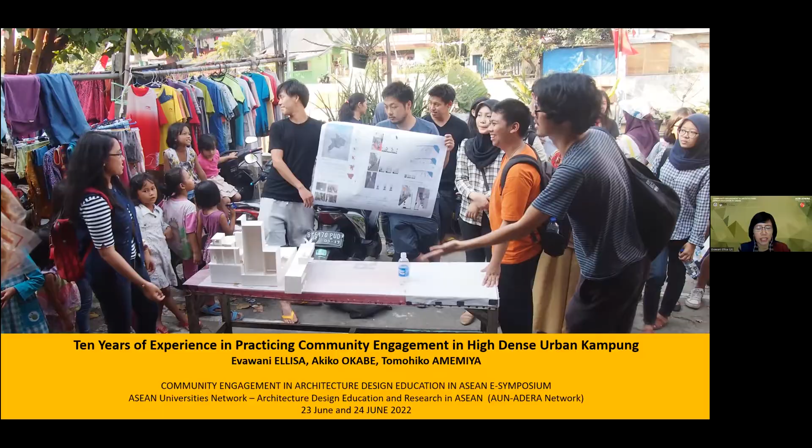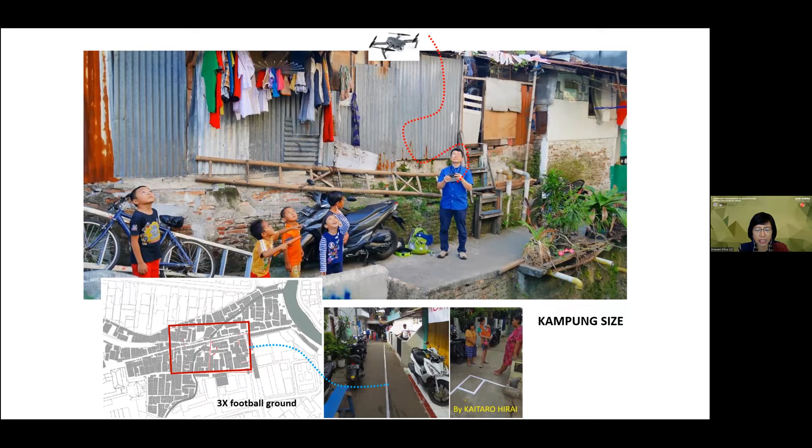Kampung Cikini is a very small, crowded settlement. It covers only 3 times the size of a football ground, or less than 4 hectares. One day, a Japanese student tried to literally draw the football ground on the map and painted the boundaries on any surface visible to be drawn, and the result is like this. The kampung structure is so complicated that we needed to fly a drone to figure out the exact situation of this kampung.

The pocket of Kampung Cikini sits in a very good location at the second ring of Jakarta, where the national monument of the first ring could be clearly identified. If you want to visit this kampung by commuter line, just stop at Cikini station and cross the street. This kampung is divided by an old market called Pasar Cikini, which forms an axis from the station to the bridge, one of the 5 gates existing at Cikini.

A small river, the Keroncong River or Kali Keroncong, lies perpendicular across the market, and the river goes all the way to the big Ciliwung River. The surrounding commercial and business development enables the inhabitants of this kampung to gain economic opportunities by offering services and petty business.

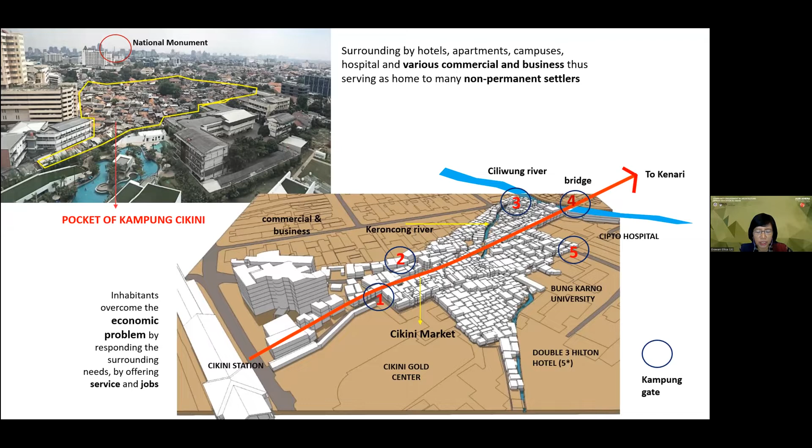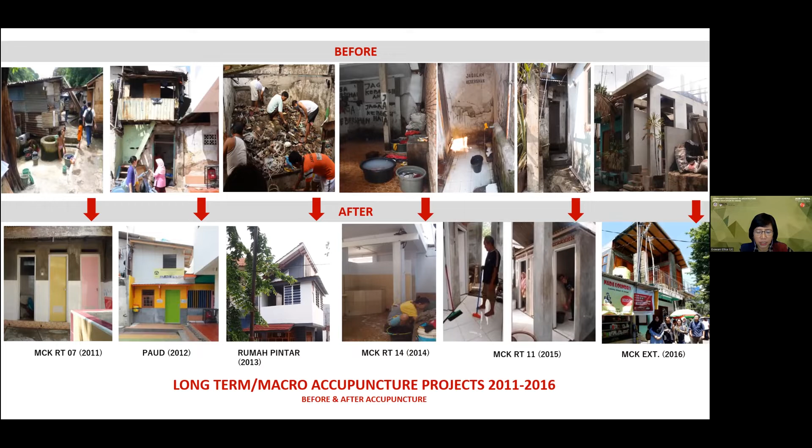To let you know, what we have done in Cikini in these last 10 years was not easy. But in short, we have 2 types of engagement at Cikini. One is through design and build projects, which we call urban acupuncture, or macro project. This is the situation before and after acupuncture.

The other engagement is regarded as a micro project, the UI-Japanese students joint studio workshop with the tagline JKTWS in Bahasa Indonesia. These activities had consistently never been absent every year until 2020, and we also consistently recorded all JKTWS into these booklets. Some of the macro projects at Kampung Cikini were the UI Community Engagement Project.

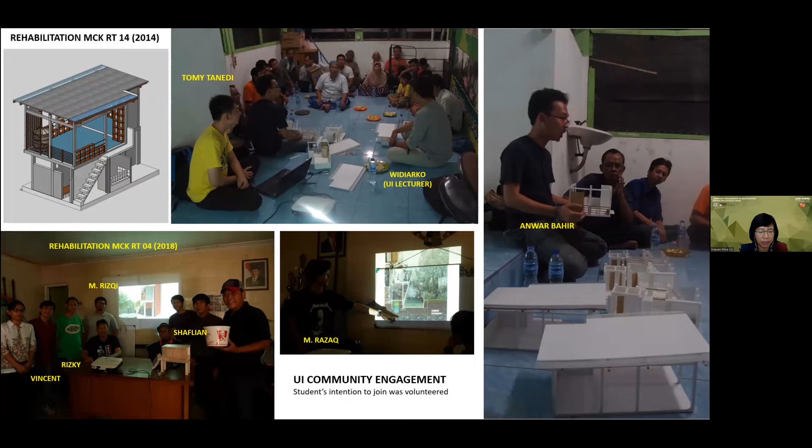In this case, I invited students through open recruitment. The community engagement at campus has never been part of the curriculum, so students never got credit for their participation. So their intention was mostly voluntary.

3 macro projects were conducted through collaboration with students of Professor Akiko Okabe under the supervision of Mr. Tomohiko Amemiya. Japanese master students lived in Kampung Cikini and supervised the project while doing their master research project. Some UI students were usually interested to join, partly because they wanted to engage with the community and partly because they wanted to make friends with Japanese students.

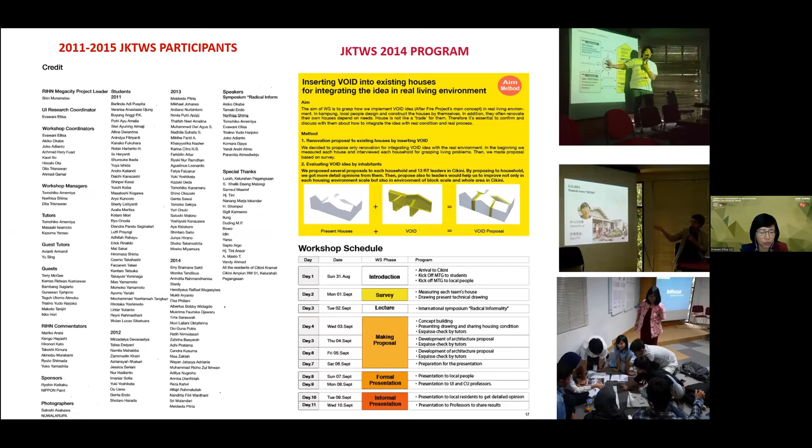In the micro small project, 8 to 10 master's Japanese students mix with 10 to 15 UI students, and they work hand in hand for 10 days. The workshop was divided into 2 main phases: the field survey at Kampung Cikini and the workshop studio at UI campus. The final proposal of the workshop was prepared into 2 different presentations.

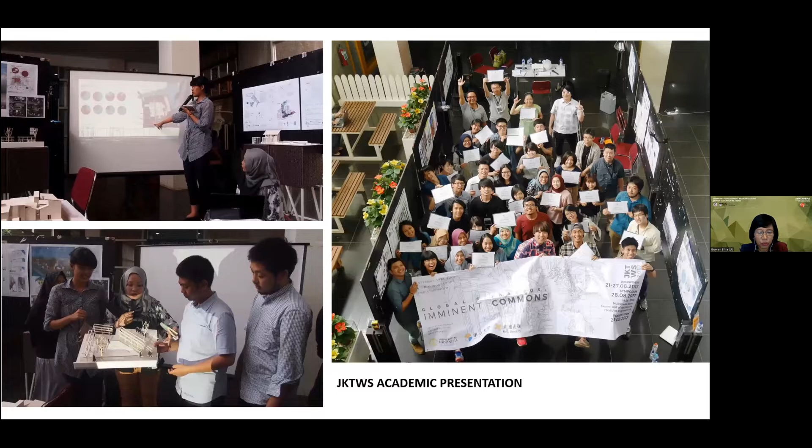One was an academic presentation at campus, and the other was a presentation in front of the Kampung community. Regarding the course, for the Indonesian student side, the workshop was not required but optional, since 10 days was too short to include the workshop into the curriculum.

However, although JKTWS is regarded as an extracurricular activity, many students were eager to join. JKTWS was also popular since students gained the opportunity to join an international program, enriching their portfolio and expanding their international network. The JKTWS was also conducted online in September 2020, and this time I tried to include the workshop into the online studio design course 5 as an additional assignment in the first and second week of the course.

Now let's go back to Cikini. Walking through the alley of Kampung Cikini will allow you to experience the hardship of the kampung's living condition, intensified by crowding inside the houses and crowding outside the houses. Walking slowly through the alley, we understand that all elements along the alley have certain meaning and function. The kampung arrangement and neighborhood condition expose how the spatial practices at kampung put into question the conventional distinction between public and private.

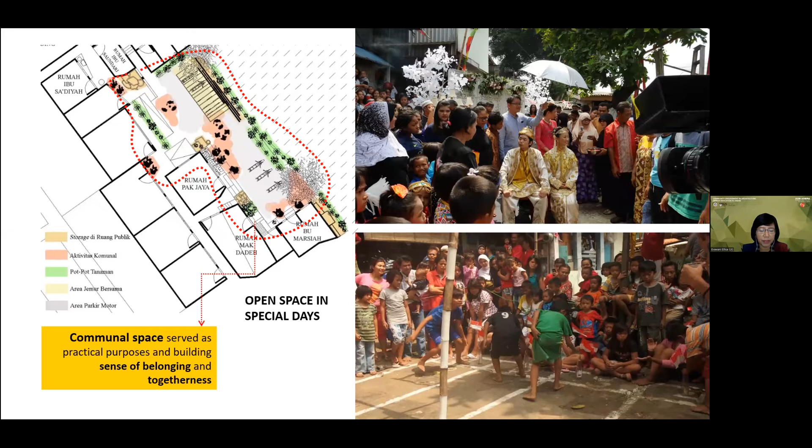Of course, on special days, like during the celebration of Independence Day, this open space is turned back to its original role as a true children's playground, and even for having a wedding ceremony, getting back to its practical purpose to build the sense of belonging and togetherness.

Now let me explain about the most important infrastructure: water. A hundred years of history at Kampung enabled the community to do self-help urban service, or informal infrastructuring. Unlike a normal neighborhood, in Kampung you become part of the infrastructure itself. If you want to go to the toilet, you have to fetch water to do your business, a situation very different from a normal neighborhood where you just simply flush and finish.

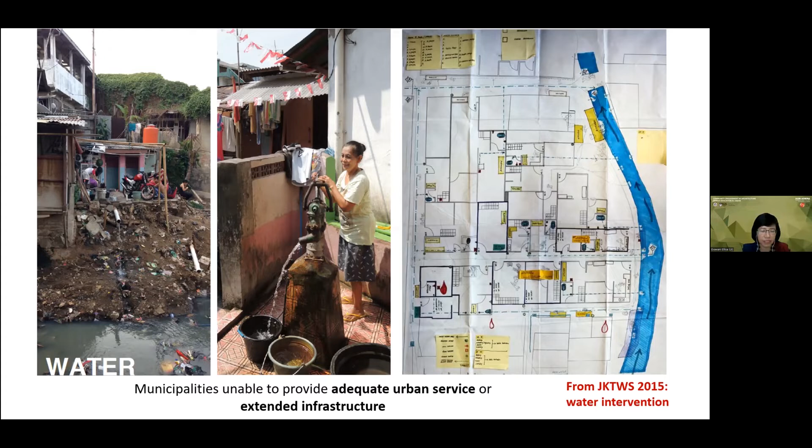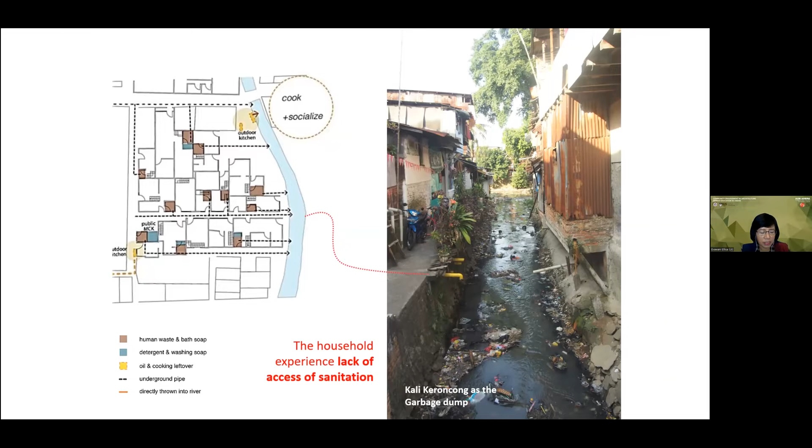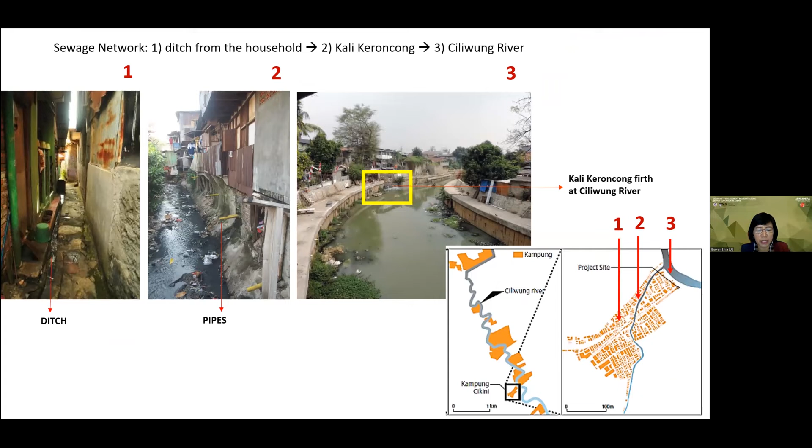The most difficult problem is how to get rid of waste and gray water at the Kampung ground. As you can see, all solid and liquid waste from toilet and kitchen goes straight to the small river of Kali Keroncong without any processing to neutralize it, such as using a septic tank or any controlling device. So this is how the sewage network in Cikini works: from household, down to the ditch, then to Kali Keroncong, and at the end to Kali Ciliwung, polluting the river.

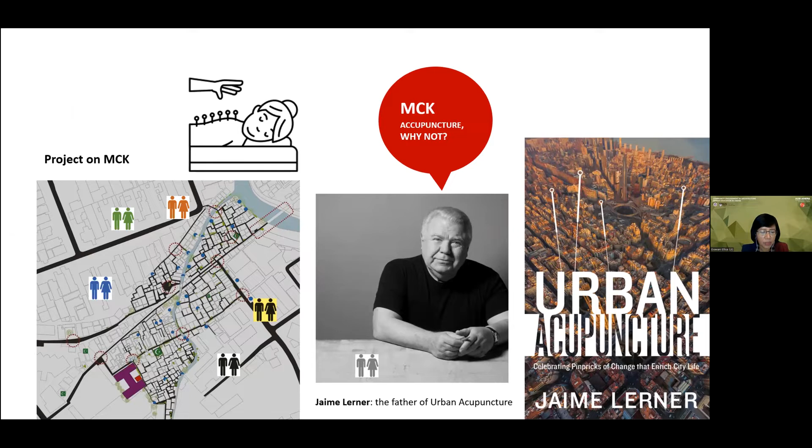Realizing that the basic infrastructure of the ritual cleaning component of Kampung is really crucial, recently we are focusing on the idea to help the community improve the public toilet, or MCK. This high-density settlement has 29 MCKs to supply the shortage of existing individual latrines that are insufficient to cover the demand of toilets for 5,000 residents.

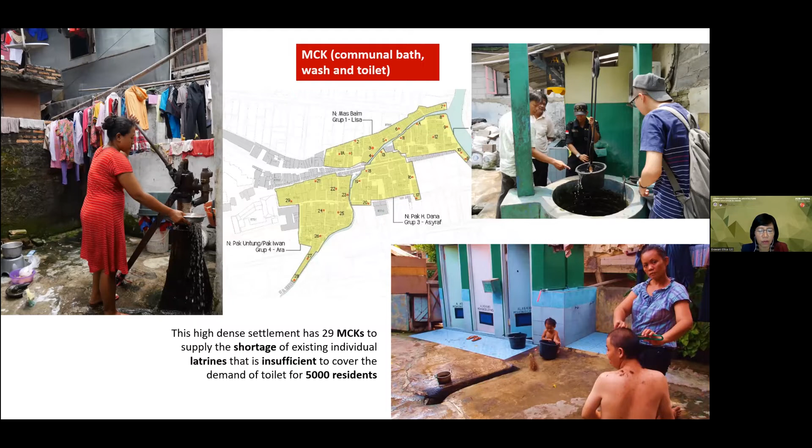Originally, MCK is infrastructure provided by the government as a solution to increase health and hygiene levels in high-density informal settlements. The government set standards for MCK, and during the 1980s, tried to abolish the MCKs usually set up by inhabitants along the Ciliwung River.

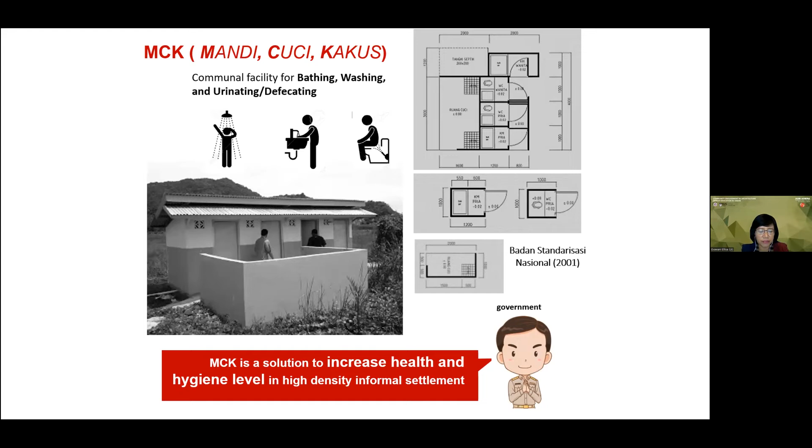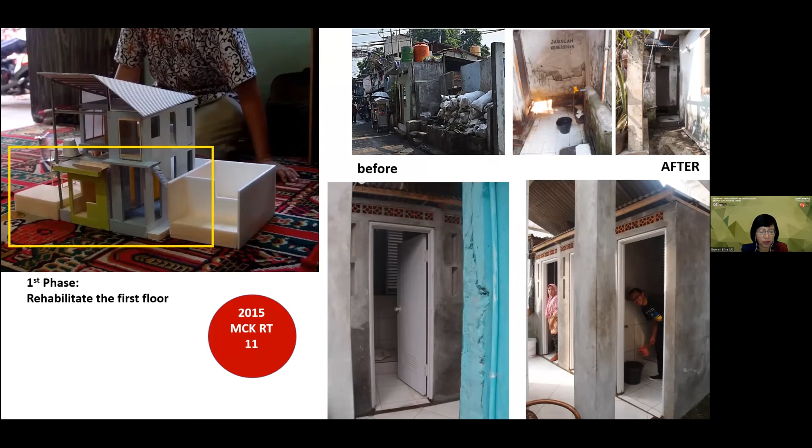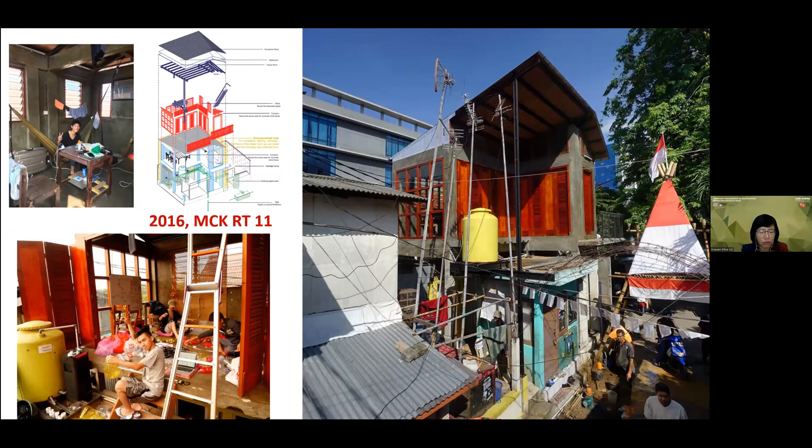In 2016, we finally completed the building like this. On the first floor, we kept the function of the MCK, and on the second floor, we added a sort of multifunction room. When the community gets ready, we intend to hand the building back to them so they could use the second space as a rental room, and the community could gain a kind of revenue that could be used for maintaining public facilities at Kampung.

As I mentioned earlier, Cikini is a very tightly packed and compact settlement with a high intensity of passersby or strangers, which provides abundant economic opportunities on one side, but is socially vulnerable on the other side.

Since Cikini is one of the typical slums in Jakarta that faces the problem of drug consumption, the most vulnerable element of Cikini is of course the MCK. The location of the MCK is really inviting for drug consumption. Therefore, MCK truly represents one of the wicked problems that should be faced in a high-density Kampung, both the problem of health and the problem of social illness.

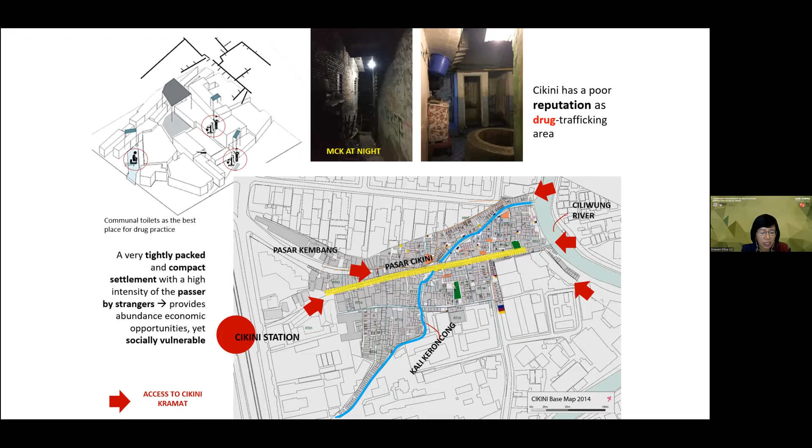Another problem at Cikini is the presence of a very primitive toilet, popularly known among the community as the helicopter toilet.

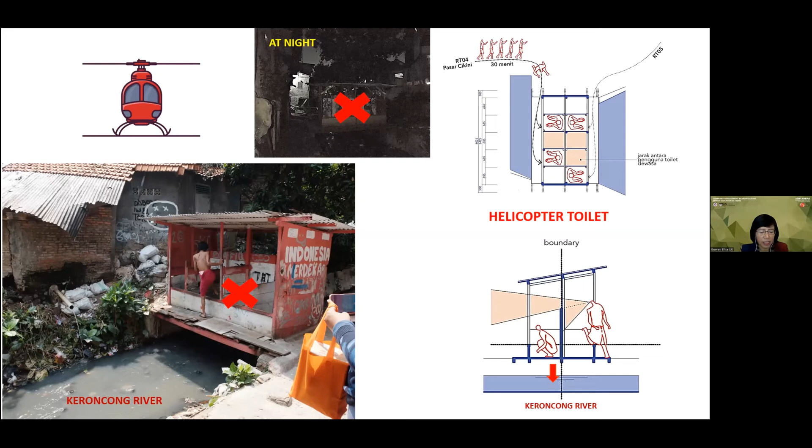Helicopter refers to the condition of toilets that sit on the river in such a way that anybody who intends to do their business simply sits, and all the waste directly goes down to the Keroncong River. The best solution to solve the toilet helicopter must be to remove the toilet and move it to another site, or incorporate the MCK with another MCK.

This would increase the capacity of the existing toilet. But it was surprising that although the MCK is public, the community defines a kind of unwritten rule to set up invisible territory for every MCK. Therefore, the scenario to move the toilet to another site eventually became impossible.

There is no other way except to build the new toilet into a semi-helicopter toilet like this. Of course, we properly insert a septic tank in this new toilet, and we also try to maximize as much as possible the existing situation so that consuming the drug at the toilet could be avoided.

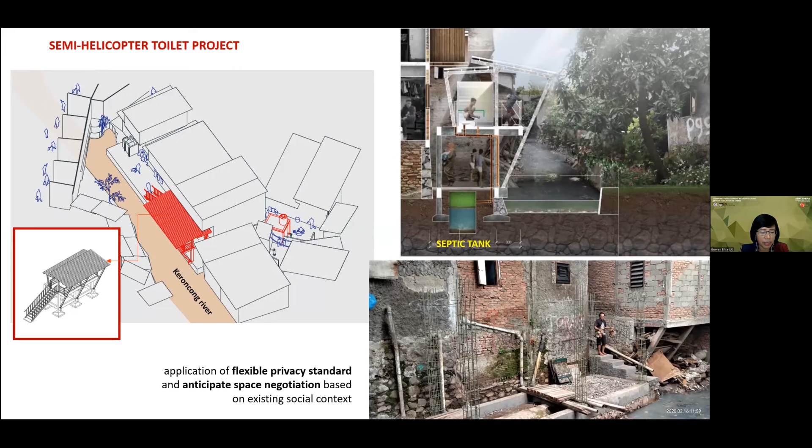This is still an ongoing project and stopped at present because we ran off the budget and also because of the pandemic. This is a very small project, but also very interesting since so much strategy should be applied, both technically and socially. After 10 years involved in Cikini, I am often asked, why is Cikini still messy?

My answer is that we will never be able to erase the messiness, and also it is not our intention to eliminate the messiness of the Kampung. I think we as outsiders need to understand the messiness before judging the messiness at Kampung.

Our theme for the Joint Studio workshop in 2017 was bricolage, or a skill of using whatever is at hand to create something new. The workshop uncovered that when you see junk or things that seem unuseful at any corner of Kampung, you need to understand that the inhabitants keep these things partly because of lack of storage, and partly because one day they will use them for practicing bricolage.

I have to tell you that enjoying this situation again happens during Independence Day, where the whole community comes together to beautify Kampung and keep it clean, but it lasts only 1 week. Yet it is more than enough for the community at Cikini. After 1 week, it's time for them to go back to reality and struggle to survive facing the hardship of living in the megacity of Jakarta.

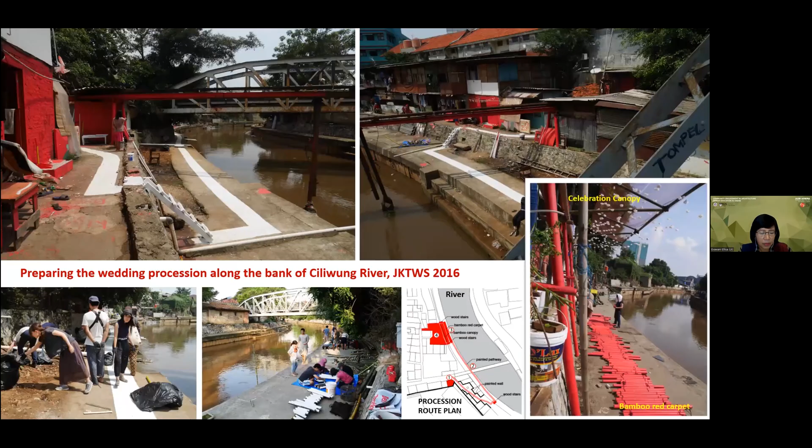In the bank of the Ciliwung River adjacent to Kampung Cikini, the government constructed an inspection road along both river banks for river protection, and this created a new interface between two systems: the informal kampung and the formal river restoration. Here, the inspection path along the river transformed into a surface that formed a fixed boundary between formal and informal.

In JKTWS 2016, this surface was proposed as the road for the wedding parade of Kazuki Ueda, a Japanese student who lived in Kampung Cikini for 1 year.

Site cleaning and painting had been done through mutual collaboration between the student and local community. A bamboo red carpet and canopy installation were erected to enliven the riverside as the place for the wedding parade, and the wedding parade celebrated the riverside as a fun place.

The riverside is not only considered an inspection road, but also converted into a happening sidewalk for the bride and groom, parents, children, students, and all local community members.

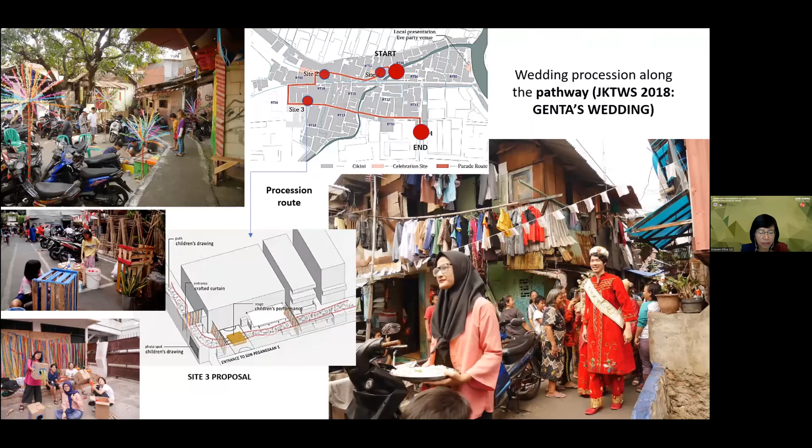Last time, I was invited to give a presentation in a webinar conducted by the Ministry of Housing and Settlement. I was asked, is it possible to erase the messiness of Kampung? My answer is yes—not only erasing the messiness, but also beautifying Kampung.

Although you have to remember that it lasts only for 1 day—I repeat, only just 1 day. We proved this when we held another wedding ceremony for Genta Sawai in 2018.

For this 1-day event, the students and the community worked together to plan and design the procession route, starting from that point and ending at that point. Some small interventions were located along the road to surprise the wedding couple and all community members, who then broke into cheerfulness and happiness. Here are some photos depicting the happy wedding day at that moment.

In this short presentation, we tried to bring together some of our past work with our more recent examination and thinking. There has been an overarching argument throughout the years, but thanks to the pandemic situation, we have had time to pause JKTWS and look for the opportunity to put all activities together into a comprehensive argument.

Our experience at Kampung Cikini showed that in higher education, the theories and practice of service learning have substantial limitations on their efficacy and sustainability. Therefore, in the future, we need to rethink and rework the potential of the transformative nature of the community-based model of teaching, learning, and research. Thank you.